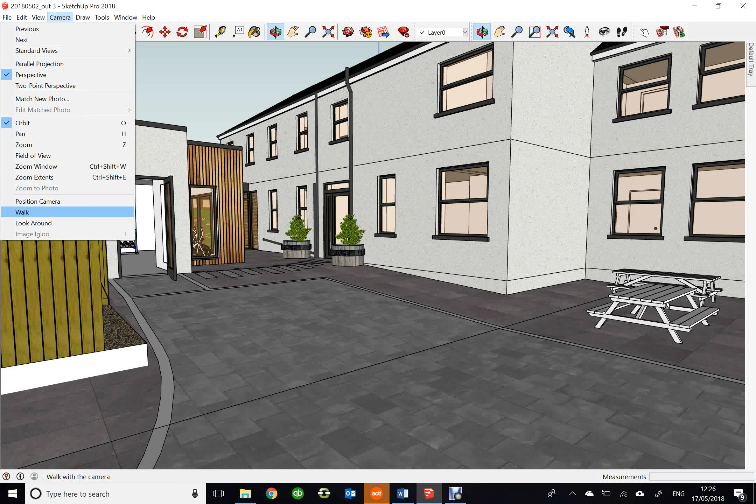It's not for everyone, it's quite time consuming, but I do like making sure I've thought everything through. When I don't do this, the project never runs as smoothly. So for me, this is quite an important aspect to what I do, and me physically putting the stuff in helps me understand what's needed.

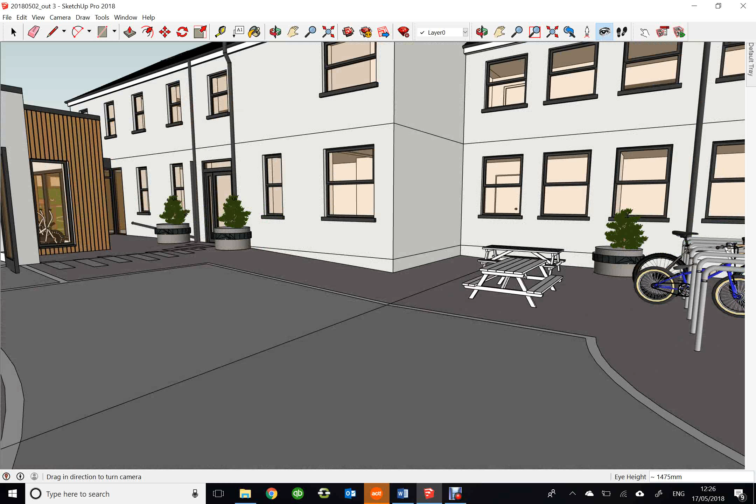So here's a courtyard. On the architect's plans and as part of the planning, there was bike storage, but it wasn't in the model, and I'd forgotten it on the specification. So by putting them in, I now know how many I want there. We've put 7 in.

I know the supplier, we can get these from Marshalls in Elland. That's a Geo hoop. But I'm also looking at whether someone can fabricate them. So I've sent them this with the specification heights and widths from here, so that they can look at whether they can make those, and explain to them how I want them fitted.

But then it allows me to think through things like we'd have to have a concrete slab under here, and then put the flanges onto the concrete slab and chemically bolt them to the slab, and then start putting this finish over the top so that the finish is cut round them so it's neater. By me doing this, it helps me consider each part of it.

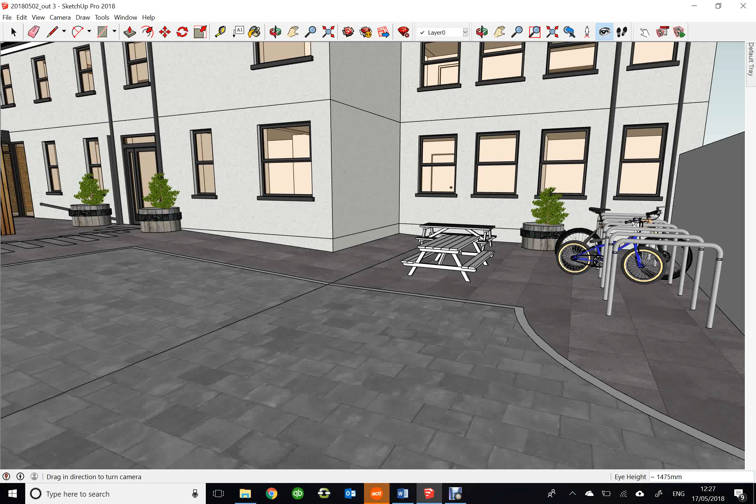We've got some sort of seating areas outside, maybe for benches, some planters, easily overlooked. The bin store wasn't there before. It's actually on the sloped part. You can see here that the land runs up to the building, so this slope here.

So we've got to put the bin store on there. If you have it too close, it'll get in the way of a gate. Again, that's something else I've thought of. We need to put a gate on here. So by me doing this, it allows me to

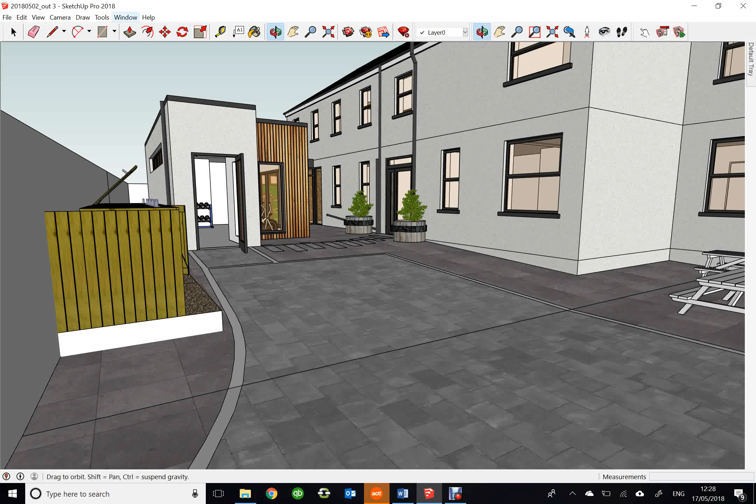consider everything. So I'm going to take on a bit of a walk around. As I mentioned, we've got the seating areas, etc. I'm just going to spin round and we can go and take a look at the bin store.

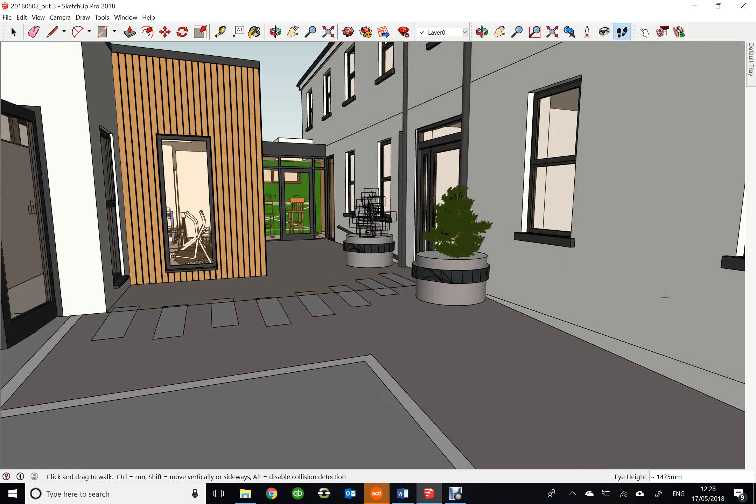I've been able to go to the bin store, so I understand the implications on site. We've got a concrete plinth that needs to be put in before the finish. So over the finish is, that concrete has to come out of the ground, be made level with a lip.

So that the resin, the pebbled resin, the pebbled ash resin, the small pebbles can be put into resin so they don't fall off and set, and then this can be built on top out of external timber like fencing material and some sort of crude hinges, and it just hides everything away.

Again, by actually physically doing this and then considering what's going to be needed, it gives someone, if I want someone to make that for me, I've now got something to give them to say this is exactly what I want, and they know what they're looking at then.

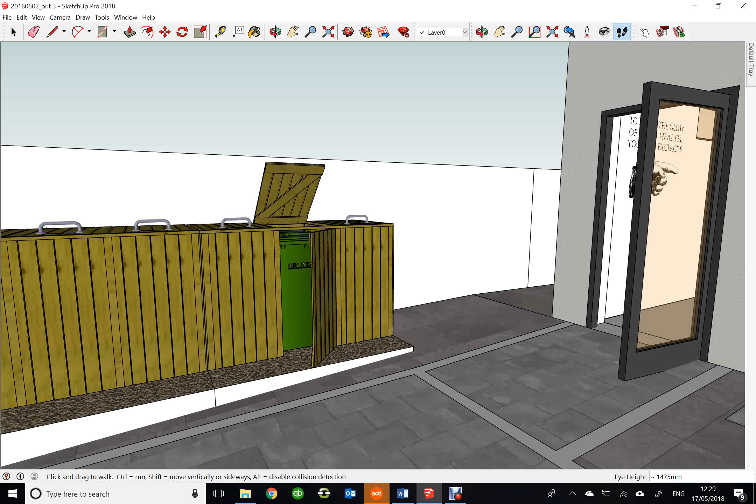We'll pop into the gym. As you can see, I've started to consider the design of the building now, and you can see here that I've actually put some graphics on the wall, starting to see what that will look like. We'll head in.

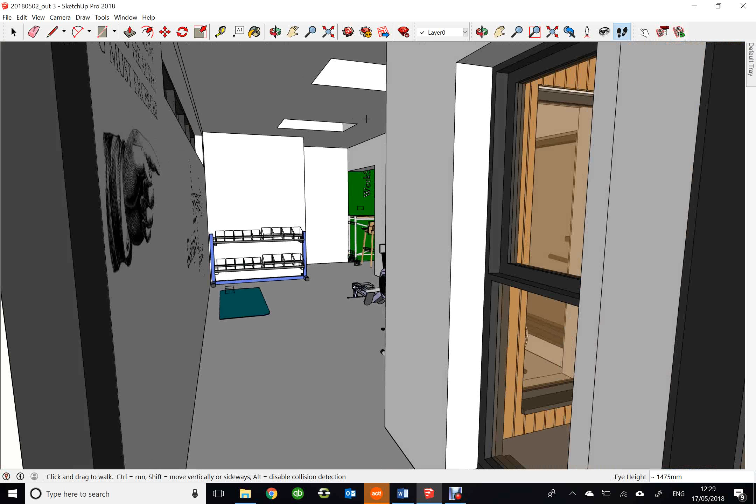Put the gym equipment in to get an idea of how much space it'll take up and what we can actually fit in.

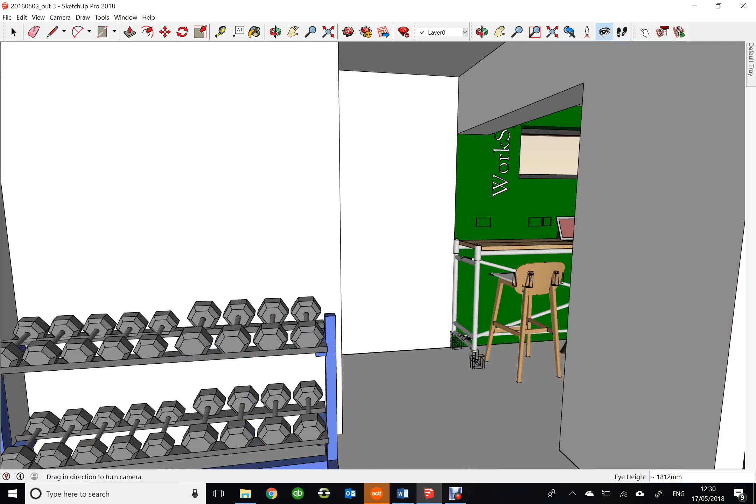Wanted to make a workspace in here, so first of all let me deal with the graphics, maybe putting some sort of graphics on the wall. There's no skirting on here yet, but I'm aware of it. I can then measure this up.

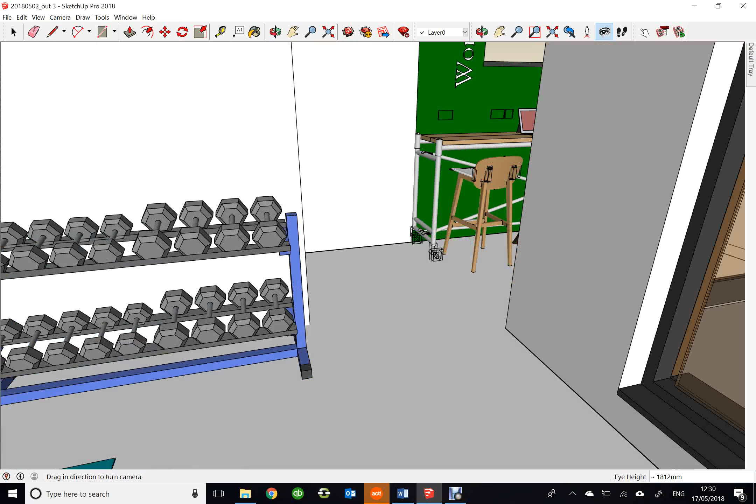We can fit a couple of mats in, so maybe some sort of weight thing just sits nicely in that space. We can fit a couple of rowing machines and a couple of exercise bikes, and a window area, leaving enough space to walk around.

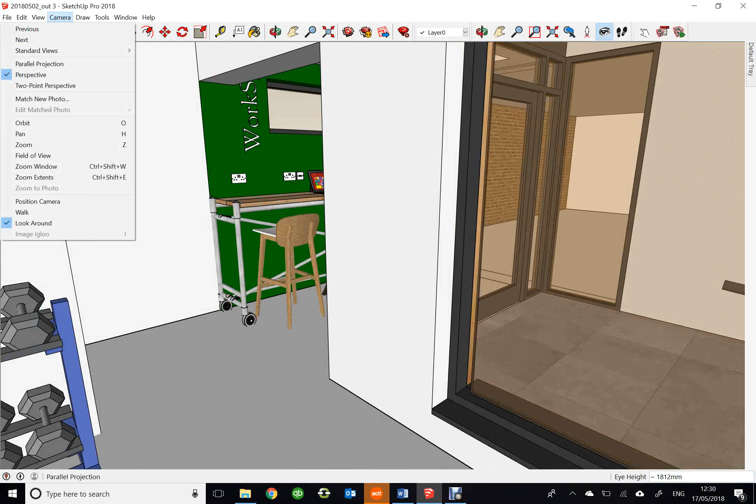Part of what I wanted, because we're looking at making this more attractive from a living point of view, is adding a sort of workspace somewhere slightly separate. So again, just considering this, looking at making just a simple sort of space.

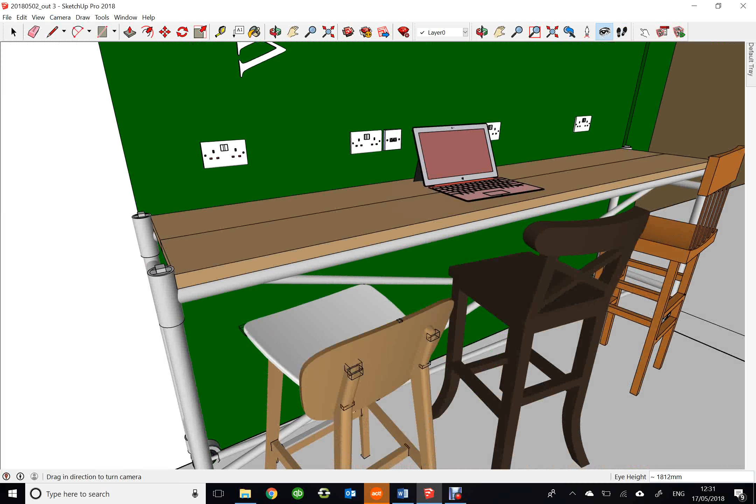We can use some reclaimed scaffolding here, something like this, some crude scaffolding boards refinished and glued together. Sockets, some of the Cat5 Ethernet connection points that can directly wire the computer in, might be handy.

3 or 4 people can sit here and work. It's out of the way of the lounge, and it's somewhere a bit different as opposed to having to be in your room.

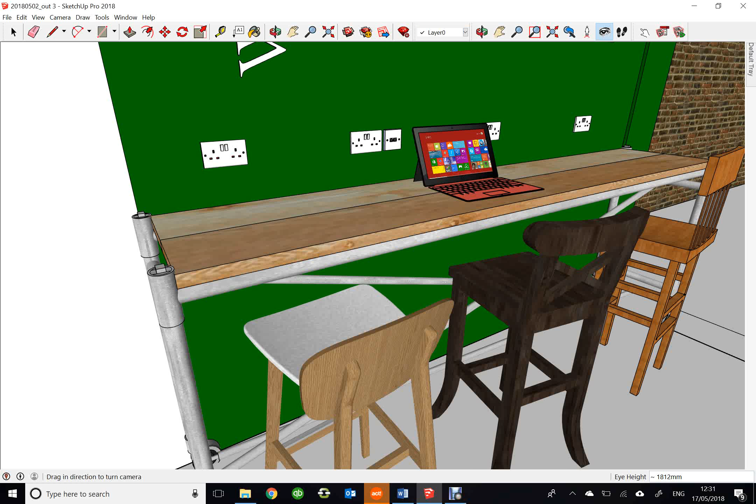Just putting some sort of feature, looking at maybe making this like a chalkboard paint on the wall so that it can be written on.

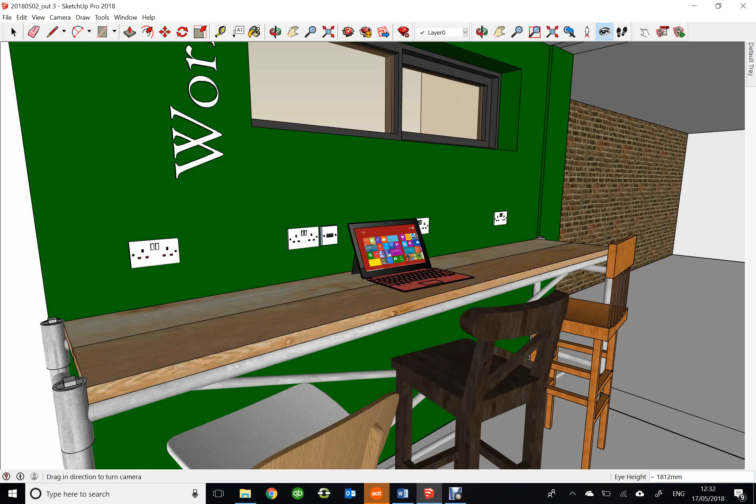Maybe looking, or speaking to the build team, but maybe looking to retain the brick wall, so it will need acid cleaning, repointing and some work to make it look right, but maybe keeping that as part of the feature in the new space. I've yet to put the kitchen in, that's sort of next.

I am working my way around the property and putting the bits in, so we'll get the settees and get the kitchen designed and what have you. But if I pop out of here as well, I can...

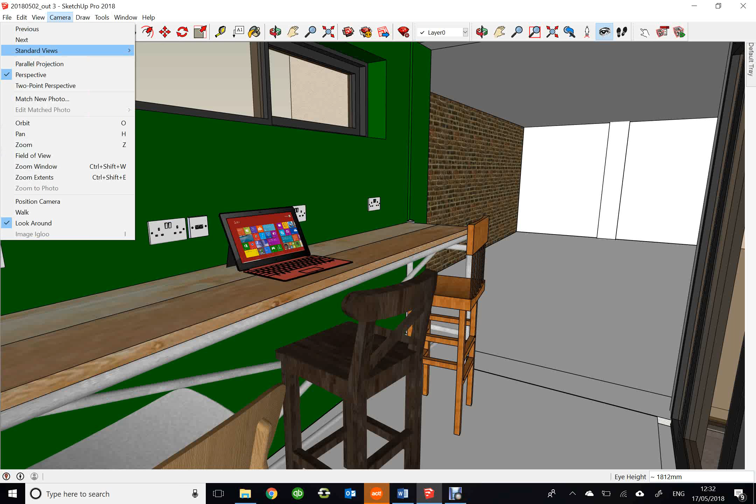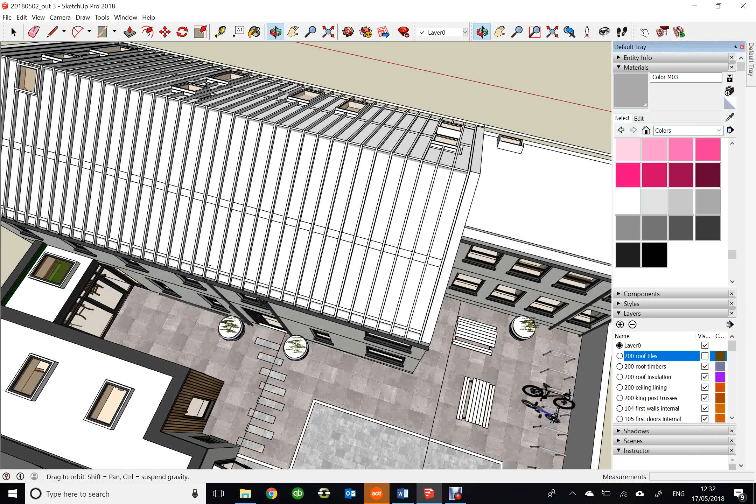You may have seen a glimpse of what I'm about to show you. I've actually started to bring in the interior fittings upstairs. So if I take off the tiles, the roof timbers, the insulation, the ceiling lining, again it's all being layered up so I understand what's what.

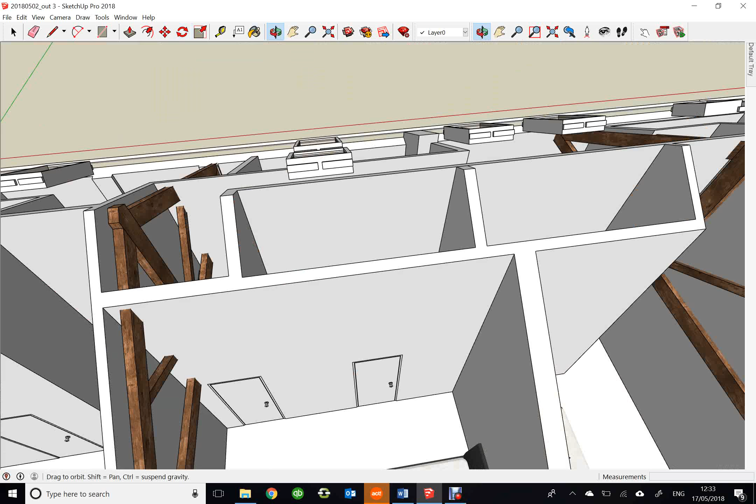We've got the king post trusses there that are now being shown, so you can start to see how they're going to look in that particular room, where they're going to intersect, where they're visible and not visible. This part here is visible in the corridor. We've got an element as you come up the stairs being visible, just to make a nice feature.

Again, these will have to be treated and washed and made right, but that's part of the original building, and to leave them in will be quite a nice thing to do.

The beauty is, as you can see, everything's labelled up, so it helps me get the order of everything I'm aware of, and as I'm going through it I can then create a specification regarding this.

First, internal walls, there they are. So I know what they're made of, I've got the specification for that, and I know it's made of 150mm Gyproc metal walling. It's insulated, double boarded with acoustic boards on the common where the living spaces back onto each other. So I've then got measurements.

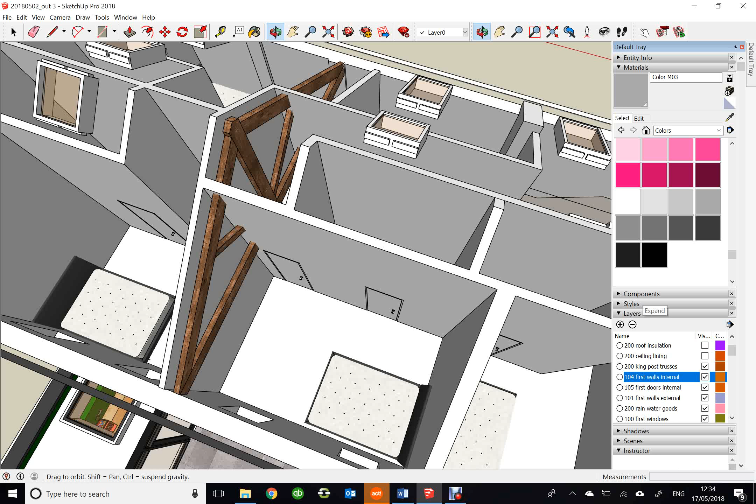As I clear these, I'm literally going through them, checking I've got that in the spec and this in the spec, and doors, I've got all the doors. It's basically allowing me to consider everything needed to make this project happen.

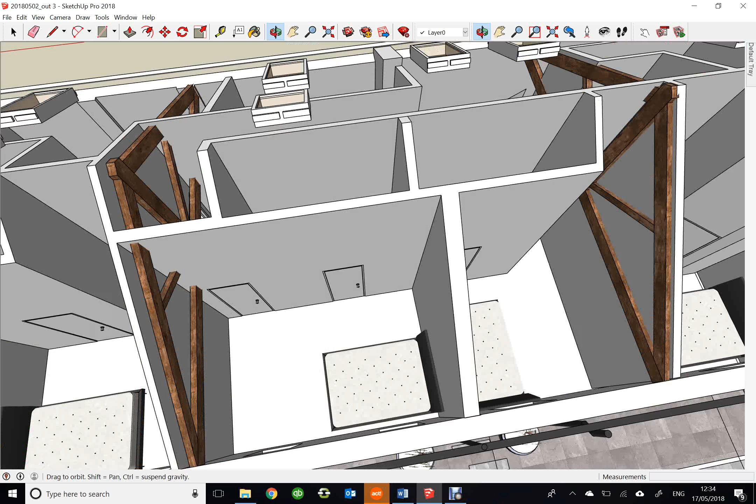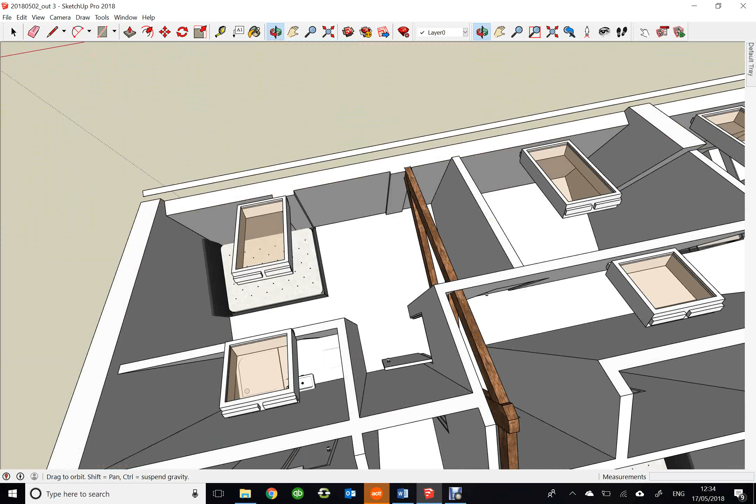As you can see, I've actually started to put in the beds, consider where they will be, and therefore can consider what the feature wall will be and how it will work. I'm starting to put the toilets in and the showers - I've not put the screening yet, but you've got the quadrant here, the shower there, and that's going to be the other kitchen, bedroom. So you start to look at where the furniture goes, what's going to be used and how it's going to be used.

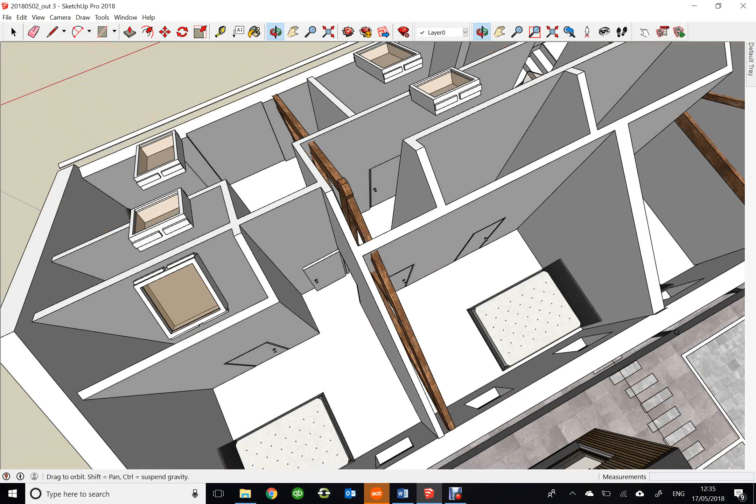Once you know this, we can start to look around the bedrooms and what they look like, and it gives us a sense of proportion. We can actually start to put people in these as well and start to get a sense of the space as people are living in it.

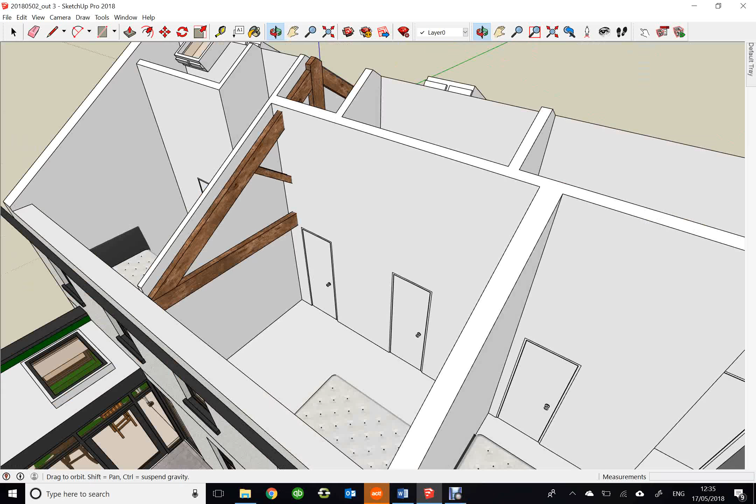So that's the model so far, and why I do it - because I find it very handy to understand what's going into the building and the work that will be involved. It's also a great tool to talk to the builder and the people on site, to say, well look, this is what we're going to do, here's the wall and this is the height of it. It's also going to allow me to work out how many square metres of this internal wall are above the standard height, so I can quantify that a lot better.

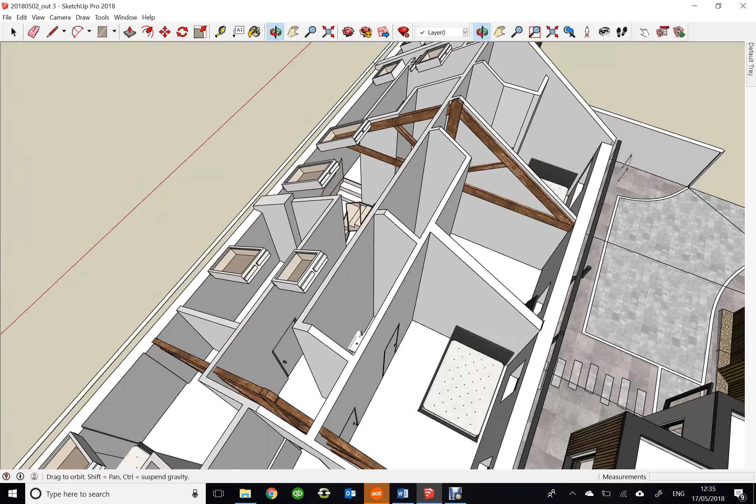Yeah, as you can see, that's the site. By bringing in the actual stuff, we'll bring in the furniture, we'll import the tiles and the carpets and the floor coverings and the stairs, and get the stairs right. The person that did the model for me has actually put glass in, but I think I'll end up putting normal banisters in, probably, because I need to keep that cost down.

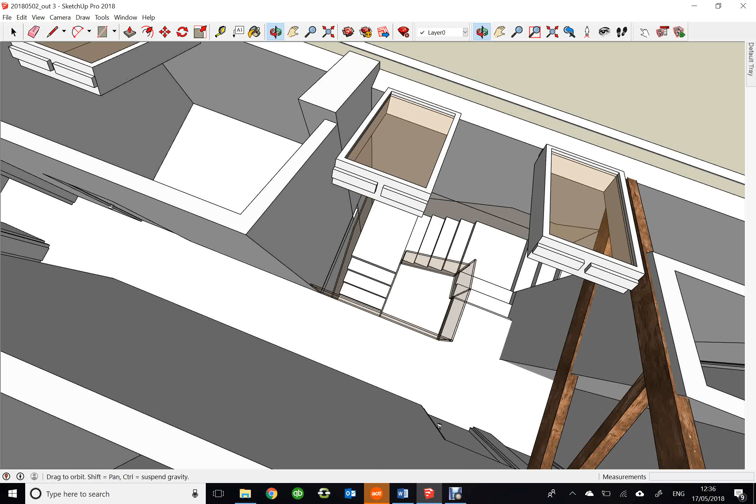There's quite a lot of glass and it's quite expensive to do it like that, so I'll probably look at an alternative way of dealing with that. But it gives you a fair idea of how the building's going together and what's involved. Just by having the trusses here and thinking, well, I need to put the wood on them, it's made me consider that someone's going to have to jet wash the timbers down or clean them, and then prepare them and put some kind of wood stain or wood treatment on them so they look new and tasteful. So again, it's in the specification to treat the roof trusses as part of the job.

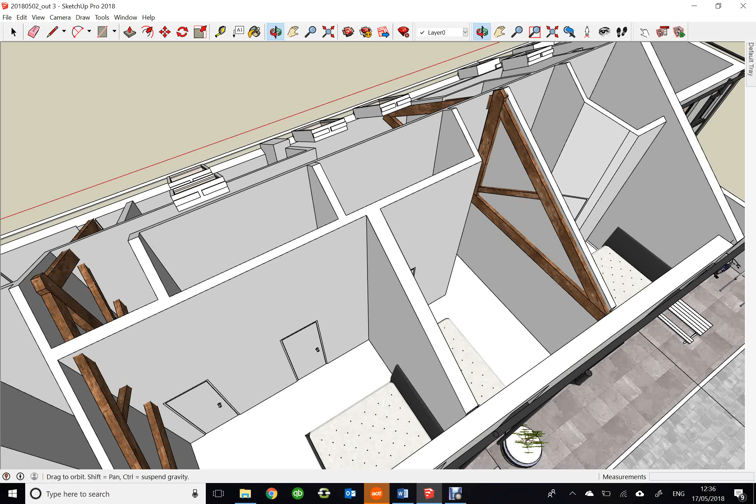By me doing this, it's allowing me to go through the process of what it's going to be involved on site, and it allows me to see everything about how the thing's going to look, how it looks from all different angles. Does it all look like it belongs together? Does the gym look right next to the office space? How does that look from the outside?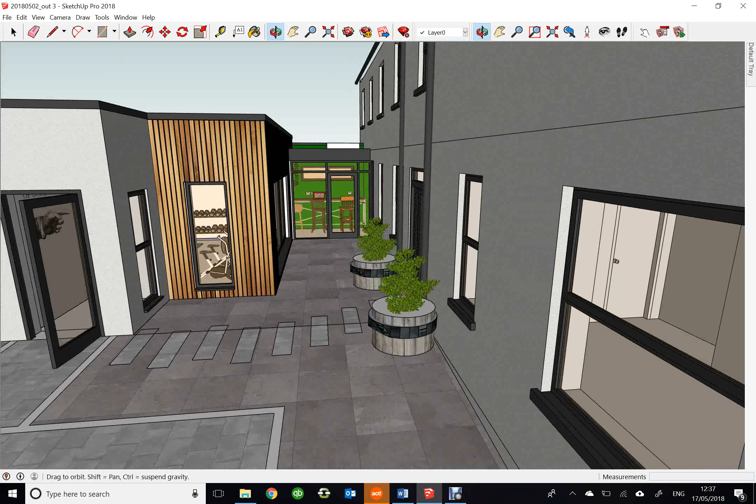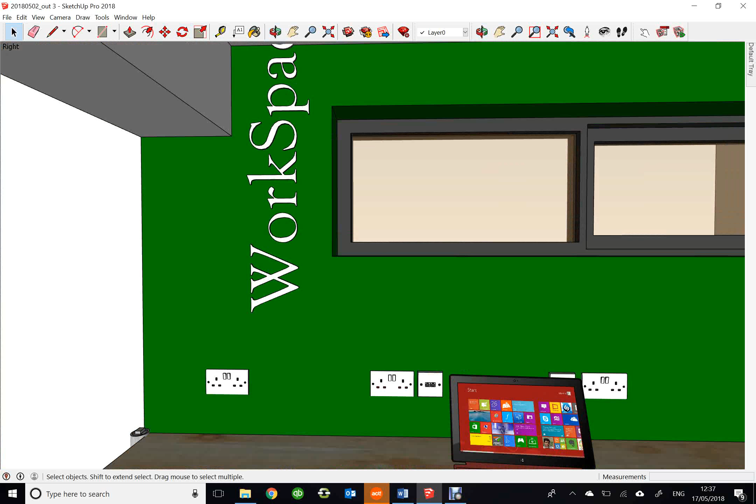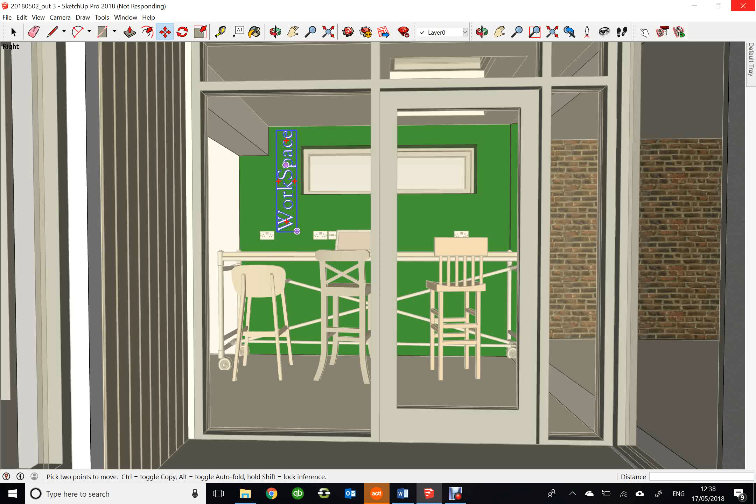Just allowing me to consider what the thing looks like and where everything's going to go, what it's going to be like to live in. As I continue to model things in, the kitchen will be next. I can make sure it's going to work, there's enough space, I can demonstrate that, and it just makes a lot more sense for me to be doing it this way. And I then know what's involved.